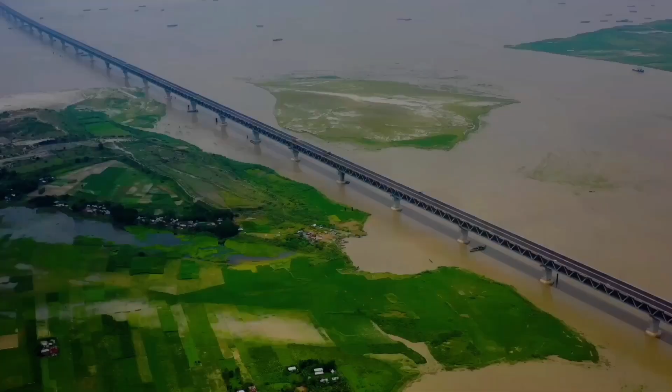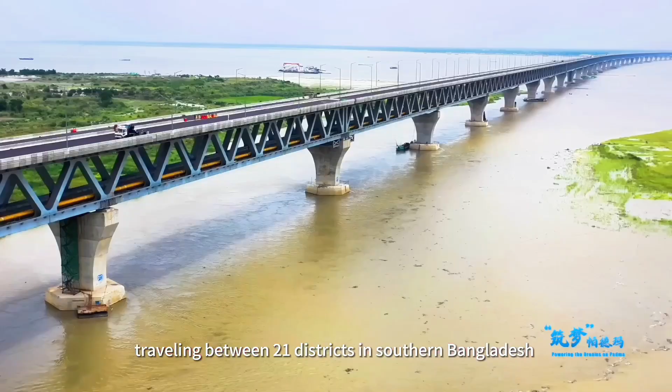In June 2023, on the first anniversary of Padma Bridge's opening to traffic, approximately 20,000 buses, trucks, and private cars pass through the bridge every day, traveling between 21 districts in southern Bangladesh and the capital city, Dhaka. The Padma Bridge is known as the Bridge of Dreams in Bangladesh, and its image is printed on the commemorative banknotes of the country.

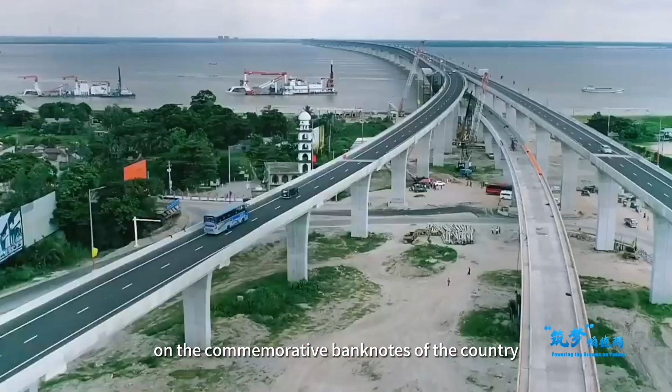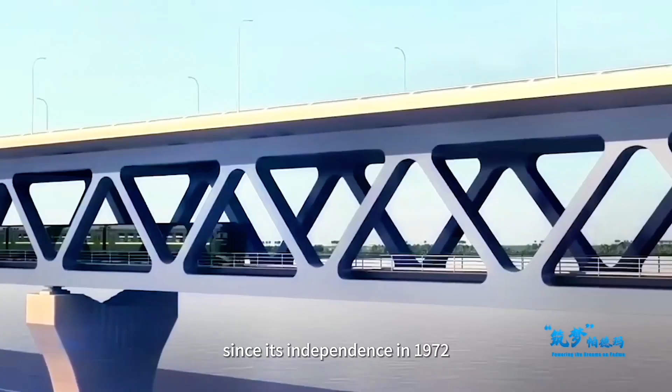The Padma River, the largest and most turbulent river in the country, divides Bangladesh into southwest and northeast regions. Building a bridge over the vast and turbulent Padma River is the most ambitious infrastructure project in Bangladesh since its independence in 1972. In the 21st century, the Bangladeshi government decided to launch a bridge construction project.

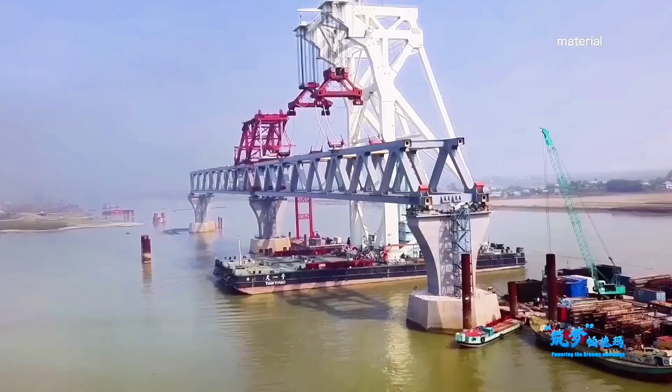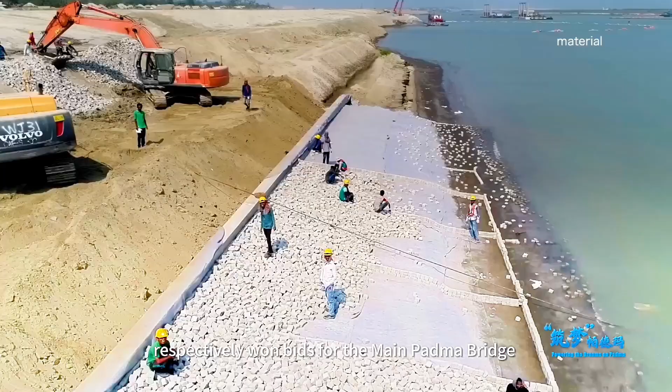In 2014, two Chinese companies, China Railway Major Bridge Engineering Group and POWERCHINA Harbour Company Limited, respectively won bids for the main Padma Bridge and River Training Project with a total contract amount of about $2.9 billion, jointly forming Bangladesh's #1 project.

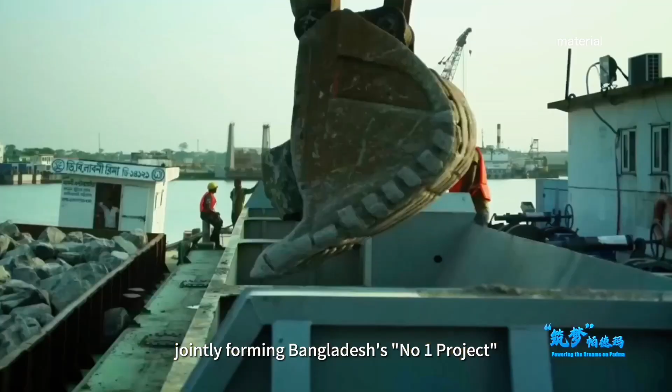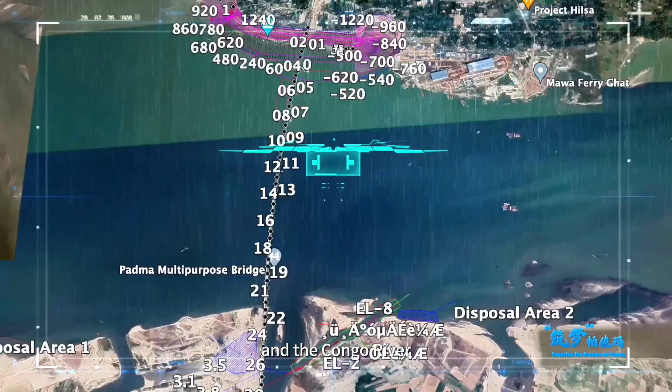The Padma River is known as one of the most treacherous and unpredictable rivers in the world, with an annual net flow of 1,310 billion cubic meters, ranking third following the Amazon River and the Congo River. The Padma River carries a large amount of sediments throughout the year, with surface flow rates exceeding 4 meters per second. During the flood season, most riverbeds were eroded to a depth of more than 45 meters. The harsh natural conditions make it unimaginably difficult to build a bridge over the Padma River.

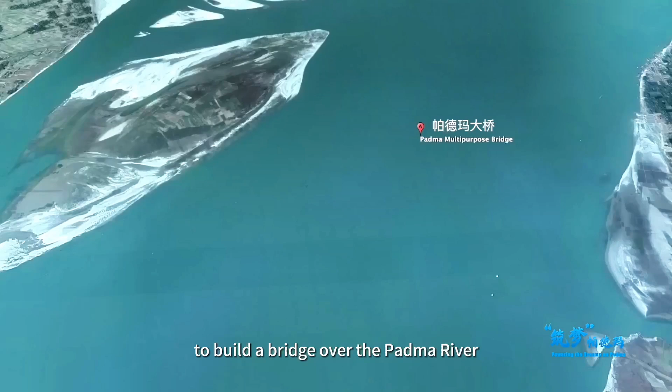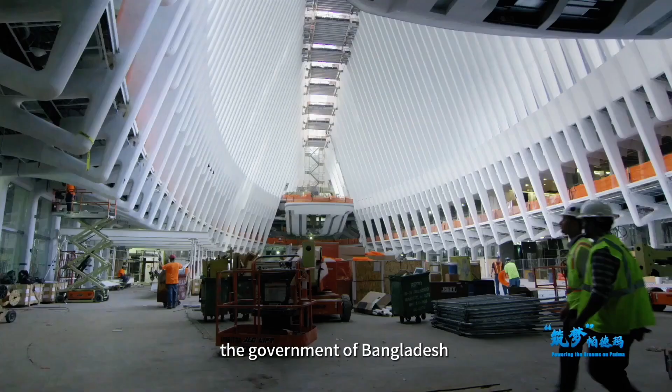Taming the flood before building the bridge. Only by controlling the water can we ensure the smooth construction of the bridge. At the beginning of the project, in order to ensure the smooth progress of the Dream Project, the government of Bangladesh invited the world-renowned architectural design firm AECOM to lead the project.

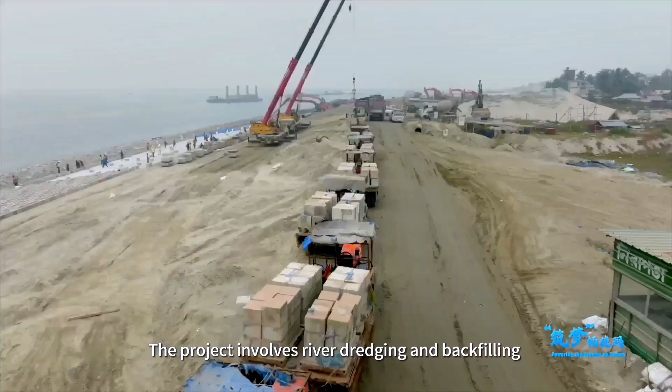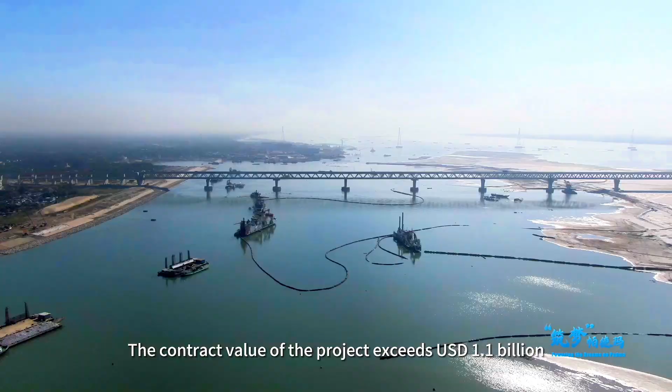The project involves river dredging and backfilling, as well as embankment construction. It also includes underwater and onshore bank retaining walls. The contract value of the project exceeds $1.1 billion. The Padma River Training Project has also become the world's largest single-contract river training project in terms of contract value.

POWERCHINA has always been a pioneer in the Belt and Road Initiative and a leading company in the internationalization of the power construction industry. As the sole professional subsidiary of POWERCHINA in port and dredging operations, POWERCHINA Harbour Company Limited has emerged as a standout player in the competition with numerous professional dredging companies from the United States, Japan, South Korea, and Europe. Its success is attributed to its strong technical capabilities and excellent reputation.

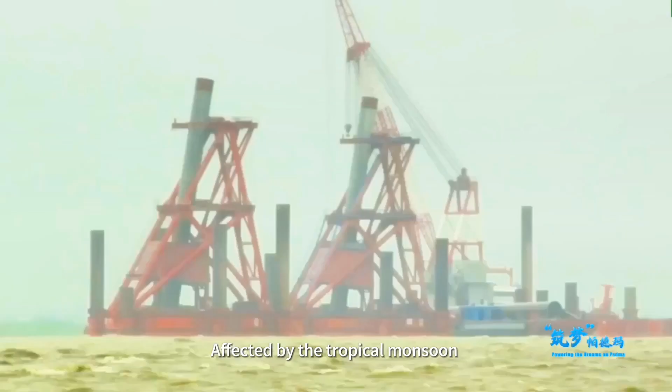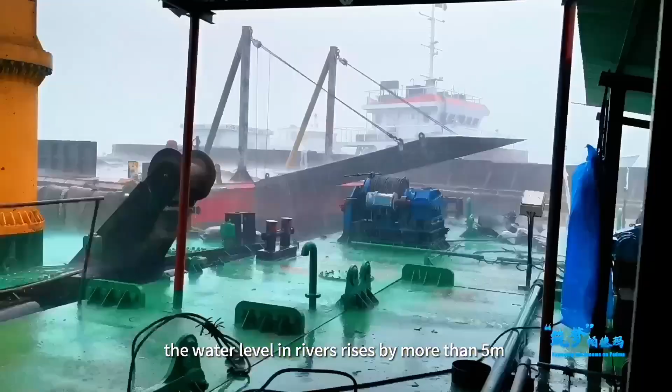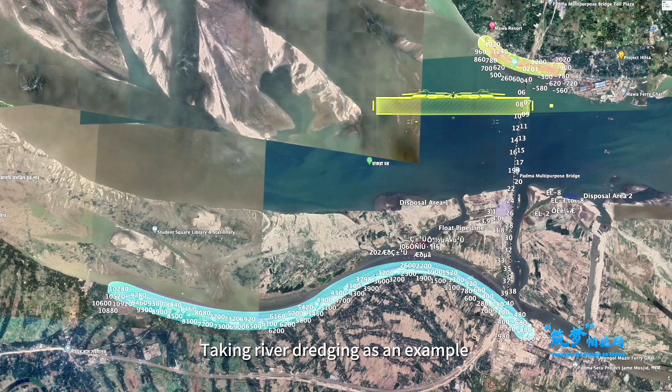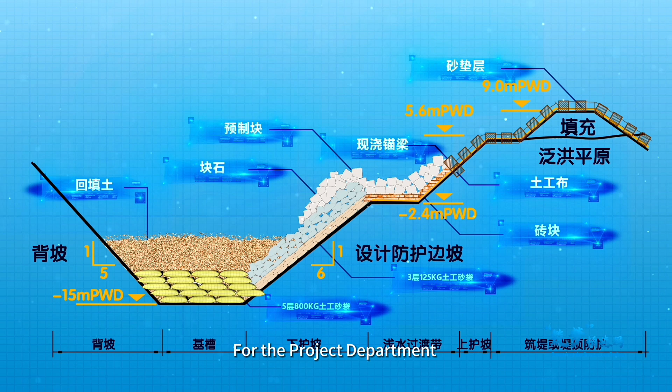Affected by the tropical monsoon, Bangladesh experiences a rainy season from June to mid-October every year. During this period, the water level in rivers rises by more than 5 meters, making construction extremely challenging. In addition to this, POWERCHINA Harbour also faces enormous construction challenges. The Padma River Training Project is unparalleled worldwide. Taking river dredging as an example, the dredging and backfilling volume of the foundation trench is approximately 75 million cubic meters. For the project department, the first major challenge is materials.

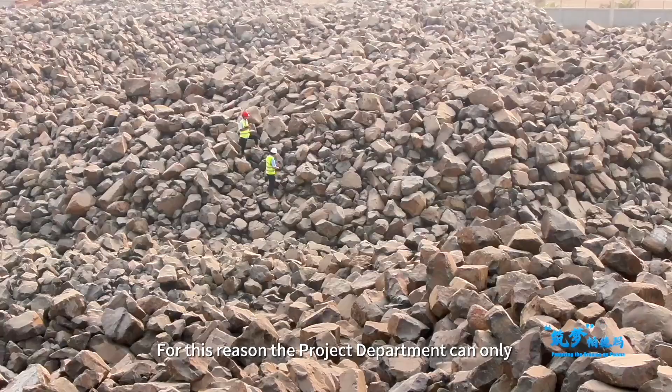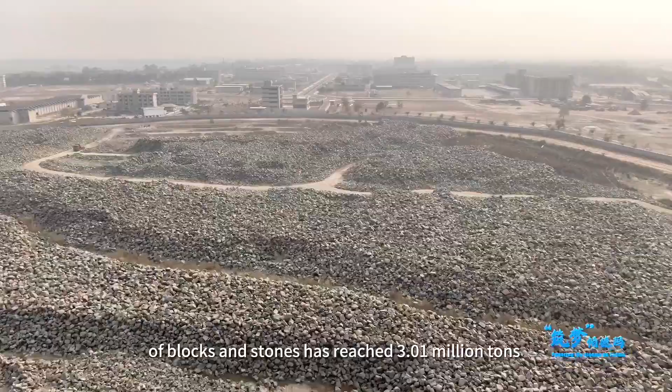Bangladesh is mostly composed of alluvial plains, with only a few rocky areas along the southern coast. But the quality of the rocks does not meet technical specifications. For this reason, the project department can only procure materials from neighboring countries in South Asia, Southeast Asia, and the Middle East. Over the past few years, the cumulative procurement volume of blocks and stones has reached 3.01 million tons, enough to fill 50,000 standard containers. The area required for storage exceeds 150,000 square meters.

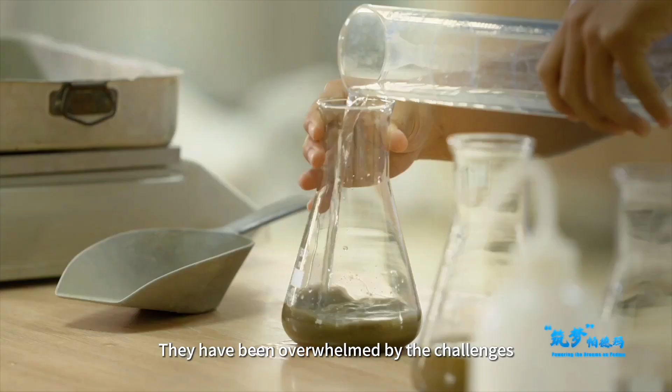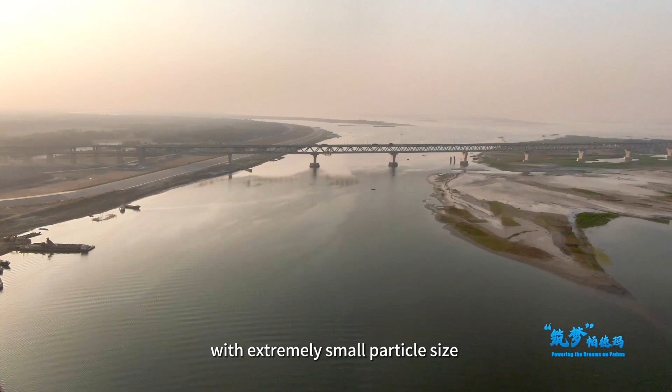For the project department, they have been overwhelmed by the challenges. The Padma River has a large water flow and fast current. The soil in the construction area is mostly fine dust sand with extremely small particle size. To resolve the situation, it is necessary to reinforce the riverbed and slopes underwater, using stones and geotextile bags in order to prevent landslides and river migration.

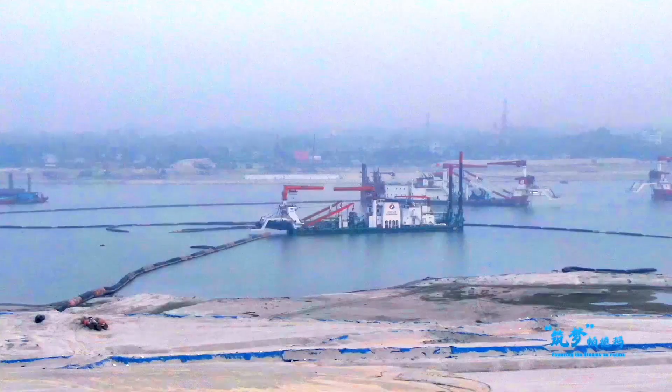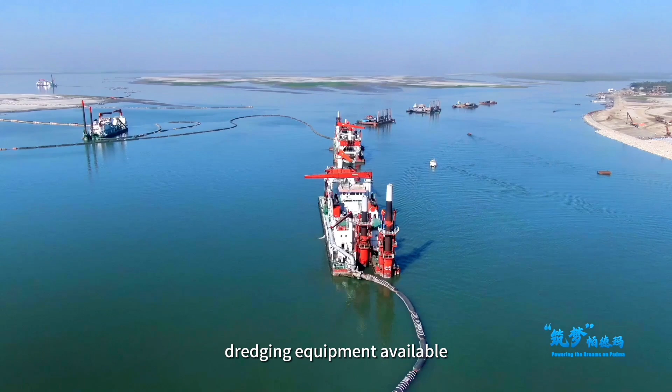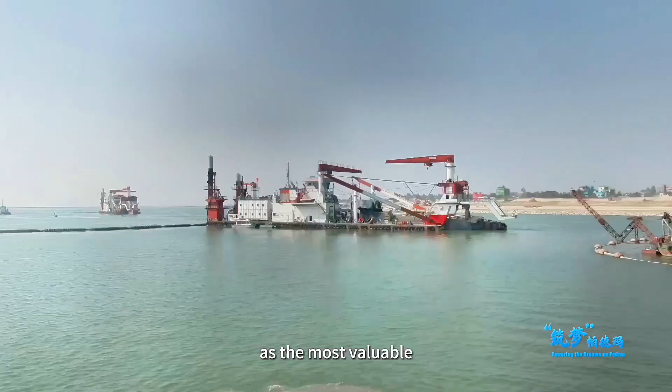In order to successfully complete this project, POWERCHINA Harbour has utilized almost all of its resources and successfully deployed 4 of the most advanced dredging equipment available internationally at that time. The 2 IHC 9029 cutter suction dredgers can be regarded as the most valuable heavy-duty engineering machinery. 2 dredgers have an investment of 1 billion RMB, with a total installed power of 13,000 kilowatts per dredger, and a maximum dredging depth of 29 meters.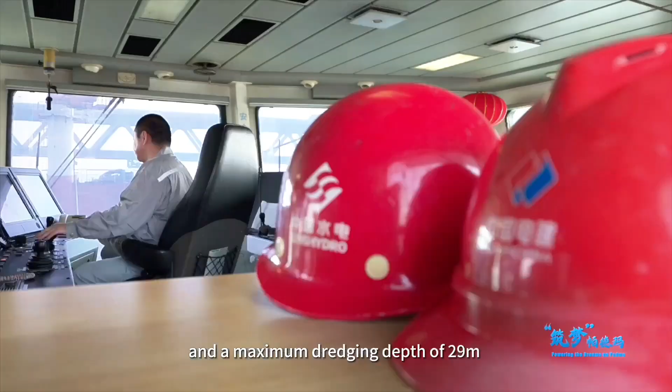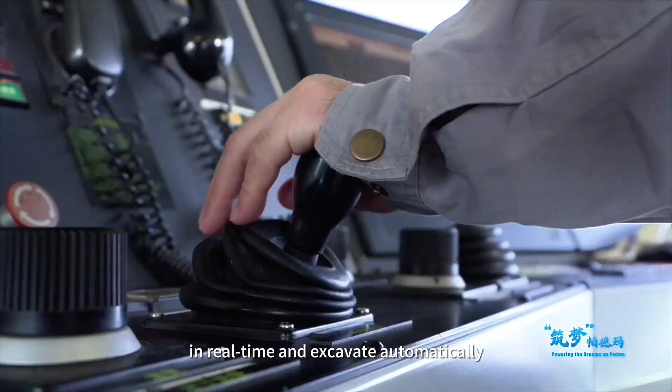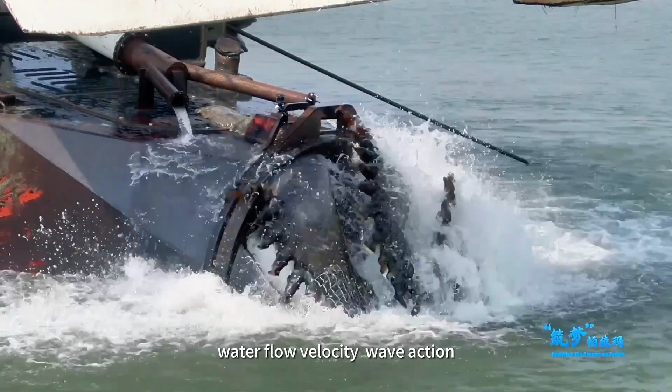2 dredgers are equipped with the world's most advanced dredging control system, DCS, which can monitor the dredging in real time and excavate automatically. However, the project department still faces many challenges that need to be overcome. During the dredging process, water flow velocity, wave action, and tidal changes all have an impact on the depth that the cutter can reach. Constructing in the turbulent Padma River, there is no ready-made experience and solution available worldwide.

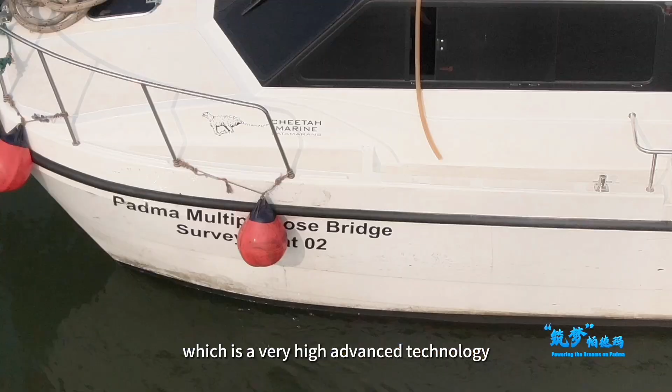To ensure the project goes smoothly, Bangladesh has invited a supervisory team known as the Dream Team, which is composed of authoritative hydraulic engineers from New Zealand, the United States, Canada, South Korea, the Netherlands, Bangladesh, etc., and established rigorous acceptance criteria. The main challenge that Sinohydro had on this project was being able to identify and look very deep down into the water. And this required multi-beam technology, which is a very high advanced technology. And Sinohydro was able to overcome this, understand the multi-beam, and use it in construction to be able to see the success of their work.

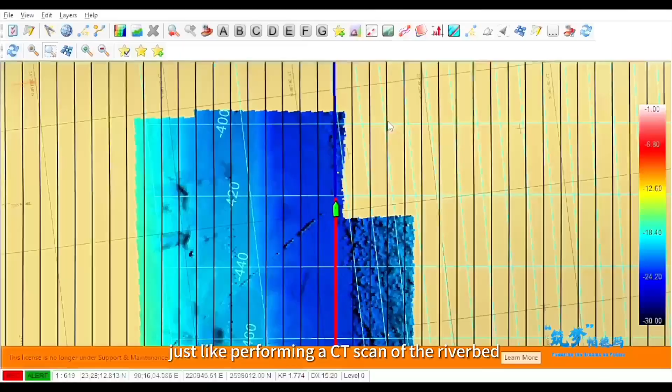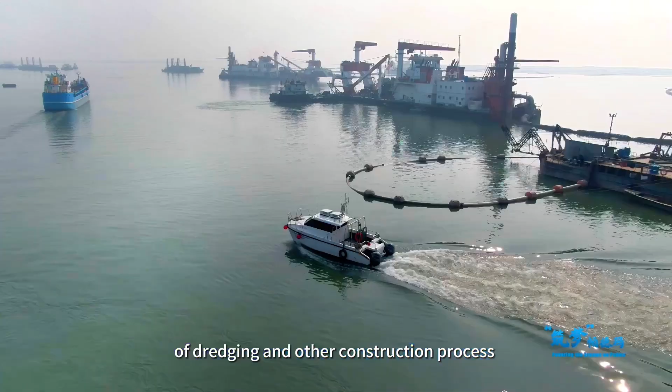This is the world's most advanced catamaran survey vessel. It utilizes multi-beam for underwater survey, just like performing a CT scan of the riverbed. From line to plane, 3-dimensional depth measurement and automatic mapping, the measured data error is only plus or minus 5 centimeters. This technology effectively solved the precision problem of dredging and other construction processes, ensuring the smooth underwater operations of the entire project.

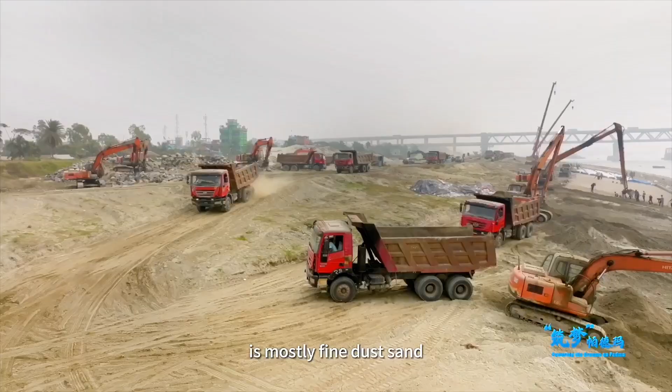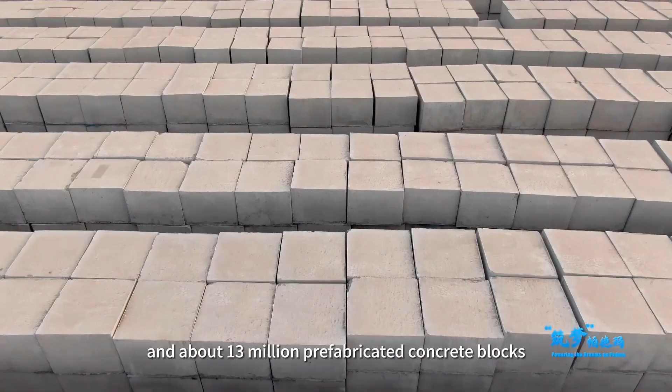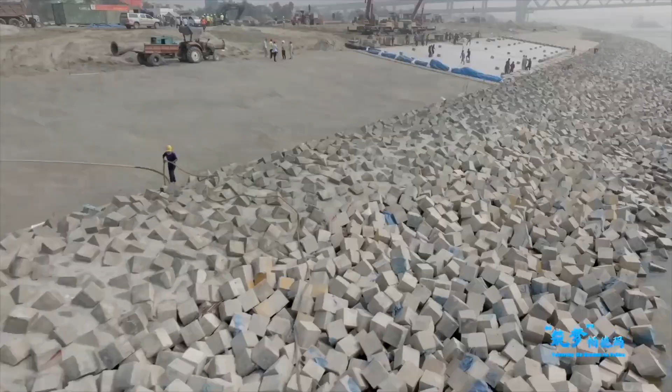Due to the high flow rate and fast current of the Padma River, combined with the fact that the soil in the construction area is mostly fine dust sand with extremely small particle size, it is necessary to reinforce the riverbed with stone-filled geotextile bags underwater. The entire project requires approximately 21 million geotextile sandbags and about 13 million prefabricated concrete blocks, both underwater and above water. The project volume is considered the largest in the world. The key and challenge lie in the precise placement and filling of 800 kilograms geotextile sandbags.

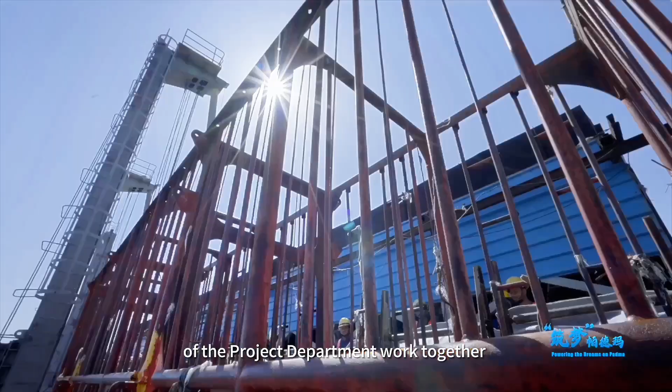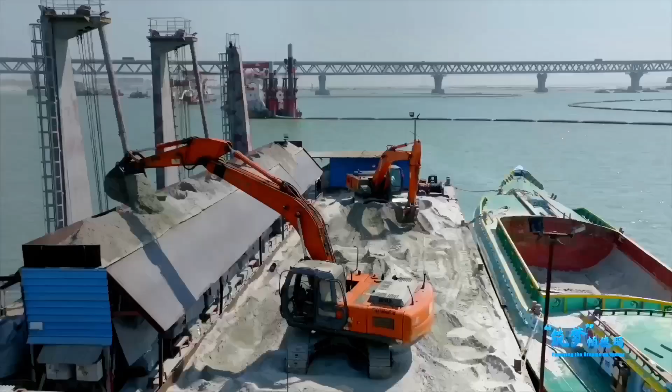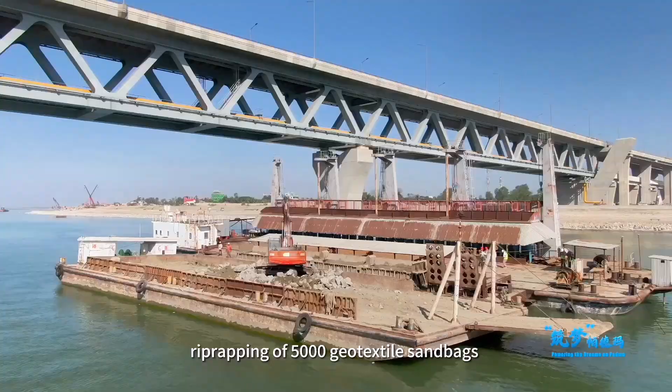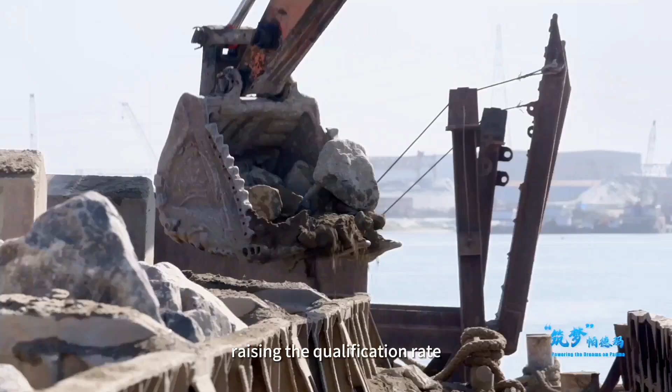All staff members of the project department work together to redesign and transform the dumping barge, installing guide frames on the site to adjust the submerged depth automatically according to the water level. Additionally, auxiliary equipment such as chain plate machines and automatic bagging machines are installed on the barge, achieving the mechanization and semi-automation of construction machinery. After the renovation, the dropping accuracy and efficiency have greatly improved. During peak period, riprapping of 5,000 geotextile sandbags can be completed per day. The project department has also made modifications to the stone dumping vessel, raising the qualification rate of stone dumping to 94.3%.

The Padma River Training Project Department has obtained over 100 national patents, utility model patents, and group-level scientific and technological honors. By continuously improving the quality management system and promoting standardization and normalization, the quality objectives of achieving a 100% acceptance rate for permanent engineering projects, with over 95% passing on the first acceptance, and a customer satisfaction rate sitting at 90% have been achieved.

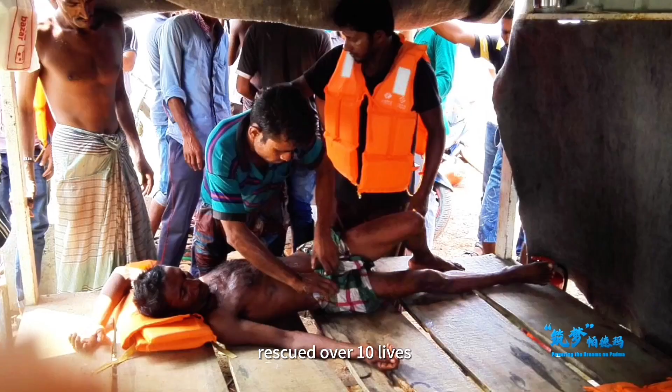While assisting the people of Bangladesh in realizing their bridge of dreams, we have been committed to the concept of mutual benefit and win-win cooperation. We actively fulfill our social responsibilities and bring benefits to the local residents. In 2017, the project department dispatched motorboats 3 times to rescue sunken local sand transportation vessels and fishing boats and crew members fallen into the water. In 2019, the project department team members rescued over 10 lives by rescuing the crew members of 2 collided and capsized commuter motorboats in the local area.

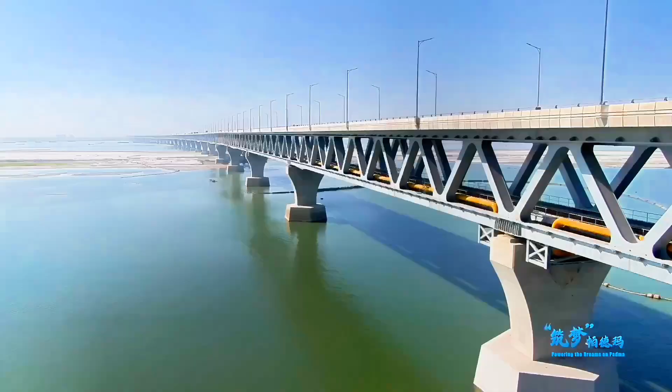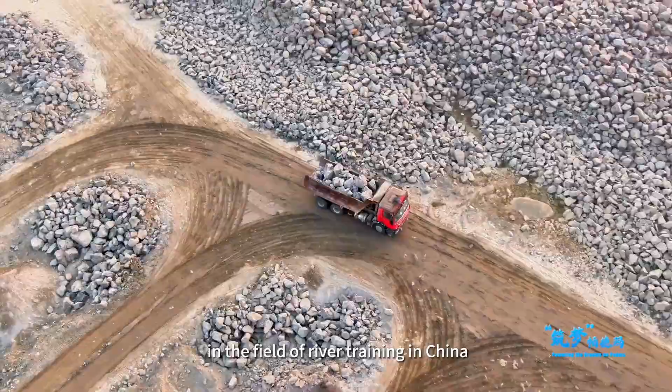Since 2018, the project department has carried out the Dreams Come True education assistance program through donation of money and goods, and has formed targeted partnerships with some impoverished families. The donated school bags contain warmth and kindness from the employees of POWERCHINA Harbour. This love is a seed sown in the hearts of children, and it will take root, sprout, and flourish in the future. After 9 years of construction, the Padma River Training Project has been successfully completed, creating an engineering miracle in the field of river training in China and even the world.